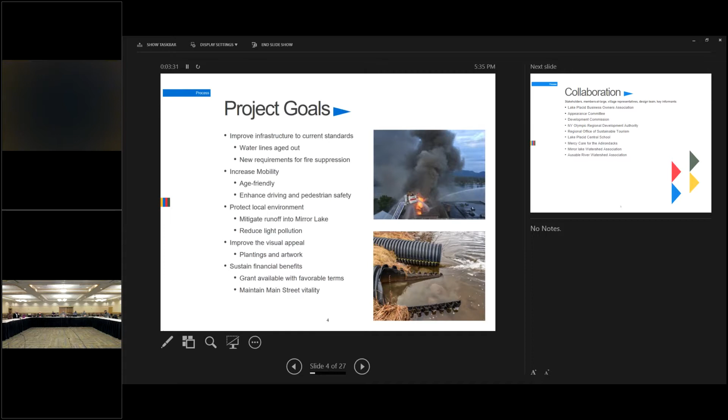And we've made efforts to reduce light pollution also. And of course, all plans say we have to maintain financial responsibility. You can't do anything which is not fiscally responsible. This particular project was the result of a great deal of collaboration.

If you're looking at your computers at home, you are looking at a fairly lengthy list of stakeholders. Mayor Randall contacted each of those stakeholder groups and asked each one to send a representative to a focus group. That's where the 21 people Mayor Randall mentioned come from. That group then met with the design team, looked at the proposals, then went back to their individual groups, who made suggestions, and then came back to the design team and revisions were made to the plan. That process occurred at least 4 times that I can recall, probably more. So there were a number of revisions based on all the input from these groups.

We can almost check the bid construction process, because as we know, very recently the bids went out. Each contractor was asked to submit two bids: what would be the cost if you worked without interruption, started construction, ended construction, and worked as many days as you could, barring the winter break. The other bid said no work during the summer season, so you would just work in the spring and fall as far into the winter as you could.

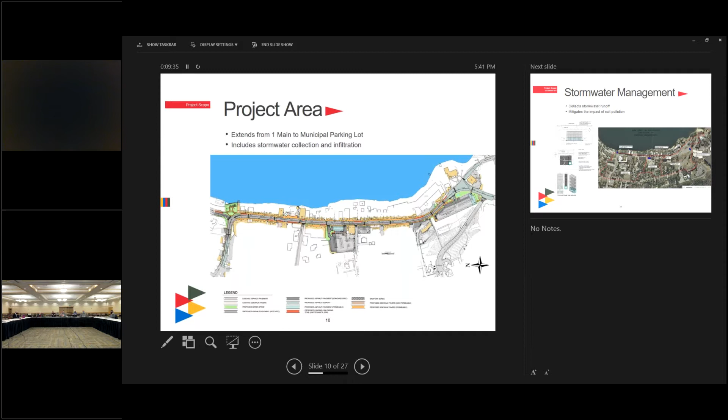The stormwater management system captures that water in 3 locations. There are 3 main catchment basins or catch areas, and they're kind of hard to see on this. One is on Main Street, the large parking lot, shown as the blue section. There's another blue area by the central lot, and another one on 1 Main.

So these are basically big bins that fill with water, and they allow the water to filter out the bottom. If there is ever a major surge and the bins get filled, then there is an overflow system that takes the overflow water out toward the Chubb River. So basically, all the water, the soils filter, and it eventually flows into Mirror Lake.

This does what we want it to do. First of all, it picks up all the point pollution, it picks up the motor oil—none of that can get through the soils. One thing we should continue to be concerned with is that it does not take the salt out of the water. Once salt is dissolved in water, it's a very expensive and energy intense process to separate the salt from the water.

It still helps Mirror Lake, however. If you can envision a storm surge, a lot of salt is being washed into the lake at once, and that shocks the ecosystem and makes it harder for all the biological functions of the lake to occur. By catching all that water and filtering it through the soils, it means there's a more even flow of salt and less stress on the biosphere of Mirror Lake.

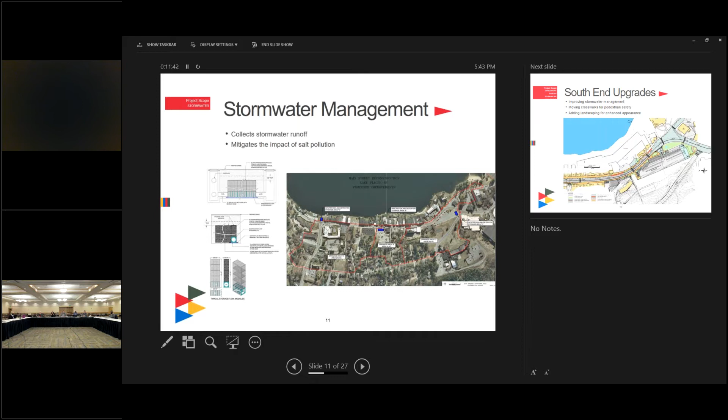Moving along then, if we start on the south end of the construction area, you are looking at the main parking lot with the post office and the Adirondack Church, also indicated by the tan structures. This area does not do a large number of changes, but there is an infiltration system you can see on the far south end of the lot. The green area, the open space area is increased, and some of that area becomes semi-permeable.

And so the idea here is we do a few things. We do work into the stormwater management system. It also keeps the parking essentially the same, and at the same time, the crosswalks are moved slightly to enhance pedestrian safety. There are not a lot of changes to grades or other parts of this section.

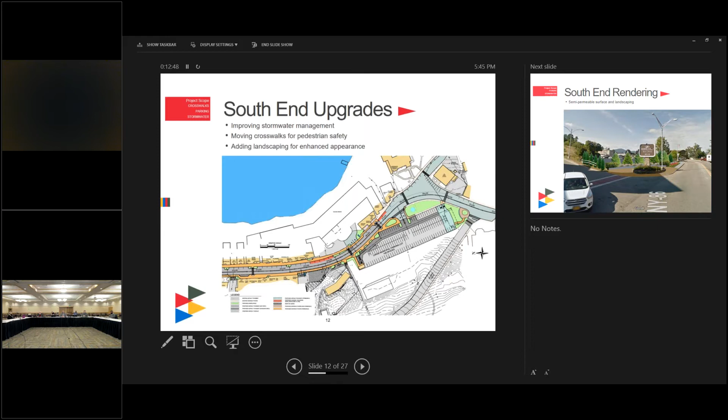This rendering shows how the extended green space in the semi-permeable surface can enhance the view of the anchor of the pedestrian area. This is the first thing a lot of people see as they enter the pedestrian corridor, and we want it to look as good as possible.

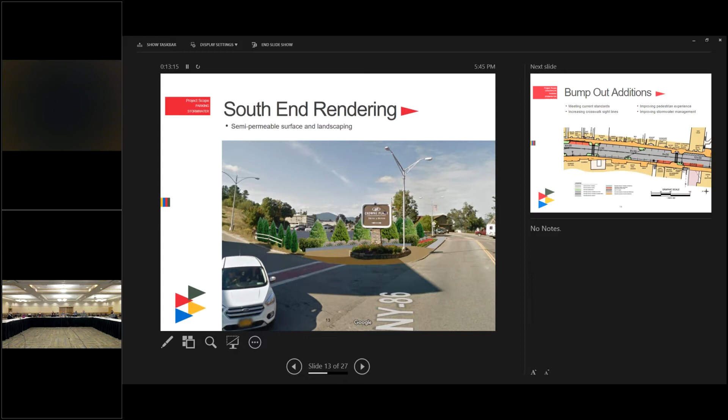As you move up the street, there are bump outs, cleverly called bump outs because they bump out into the roadway. They're the green areas bumping out into the roadway, and they have two different functions. The ones to the left, you see 4 bump outs surrounding the crosswalk, which improve the sight lines for pedestrians crossing and for drivers moving along.

We've all had that experience where even though pedestrians are crossing at the crosswalks, it appears like they're jumping out between 2 cars. You slam on the brakes, hope you don't hit the person, hope the person behind you doesn't hit you, get that shot of adrenaline, and say, thank you, I didn't kill anybody. We want to improve the experience for drivers and pedestrians. The sight lines, although people are still going to do some of the things people do, delineate the crosswalks and hopefully mitigate part of that.

If you look at the bump outs in the center, they're not by crosswalks. That's because the filtration system and water catchment basins need to have green areas, and that has a lot to do with the grant funding and how they function.

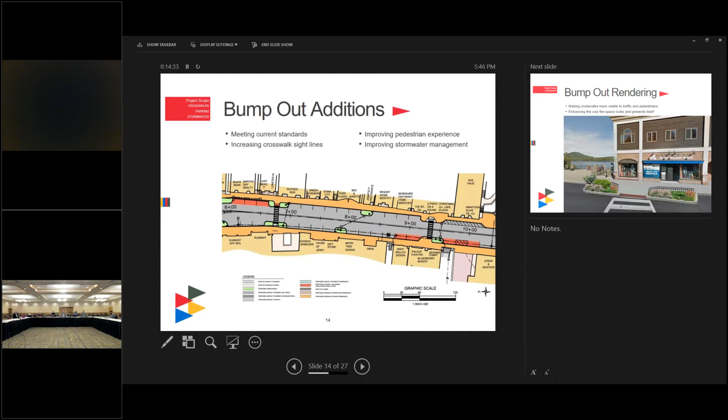Every bump out, because it has different functions, locations, and sizes, will be designed slightly differently. But this is what a typical bump out may look like, and you notice it does improve the sight lines of the crosswalks.

It has another purpose: it gives an opportunity to take some of the obstacles on the sidewalk and move them off the pedestrian corridor. So as much as possible, the light fixtures, the recycle cans, the parking meters will be placed on bump outs, so your experience of walking down Main Street will have fewer obstacles.

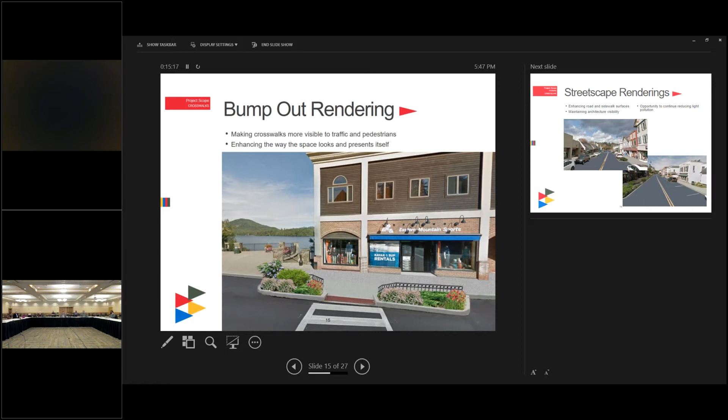More importantly, they show smooth surfaces. Main Street is anything but a smooth surface right now, and the sidewalks are anything but a smooth surface right now. Improving the surfaces of the roadway and sidewalk will enhance the pedestrian experience and the driving experience, and give everybody a little bit more accessibility.

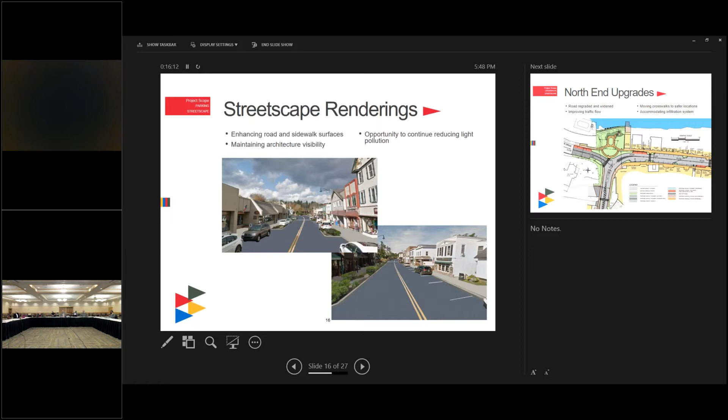Notice that the planning plans also call for maintaining the views of the architecture, because one of the unique things about walking up and down Main Street is you're walking through 1920s, 1930s kind of architectural styles. At the north end of Main Street is probably where the largest number of changes take place, or the changes that are most visible.

You can see one main park is that green area, and it is pushed out a bit. It is going to be enlarged, and it needs to be enlarged because that basically accommodates a catchment basin for the infiltration on that side of the road.

That enlargement does a few things. You notice it realigns the intersection of Mirror Lake Drive, coming in from the left, and Main Street, turning to the bottom of the slide. So it delineates the traffic flow a little better, which will help the traffic pattern. It also means we can move the crosswalks to locations which are safer and cross less traffic.

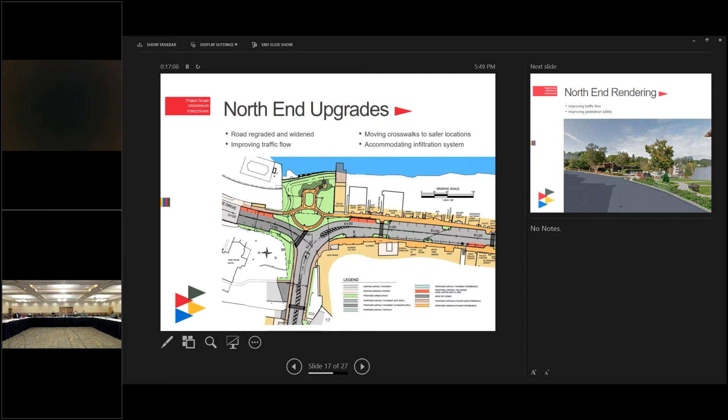There are some other things that take place there. The grade is the reason the project goes up past the High Peaks, because the grade is slightly changed. It's hard to tell on this what the original grade is, but basically that grade is changed. We've all seen snow plows, buses, and trucks get stuck on their way up Saranac Placid Avenue in the middle of winter, and hopefully this will help solve the problem.

You can also see with this rendering that as you drive north on Main Street, you no longer look straight down Mirror Lake Drive. It's pretty obvious it's a different road, so any visitors don't have to worry which way to go, straight or south.

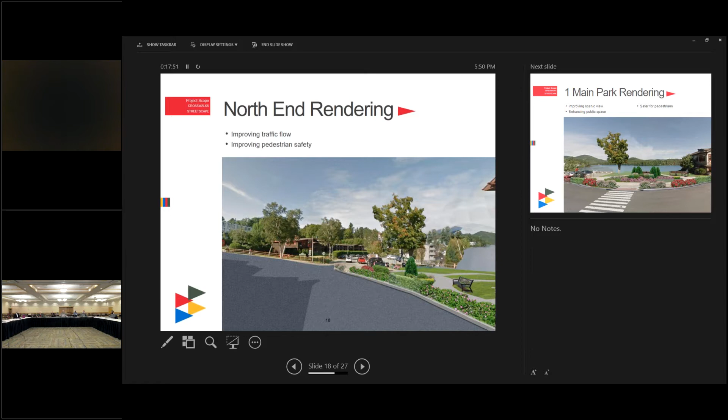And that will help that area. The next slide is a face-on view of the bump out.

We talked about having anchors on either side of the pedestrian area, so we have one of the most vibrant and vital main streets because we are a planner's delight. We have a park on the south end, Peacock Park, which provides access to the middle, and we have an anchor on the north end. In between that, we have about a half mile of beautiful scenery, a beautiful streetscape. That is what everybody is searching for in terms of creating a vital pedestrian corridor, and this, we believe, will help increase the vitality of that corridor and also increases the aesthetic views.

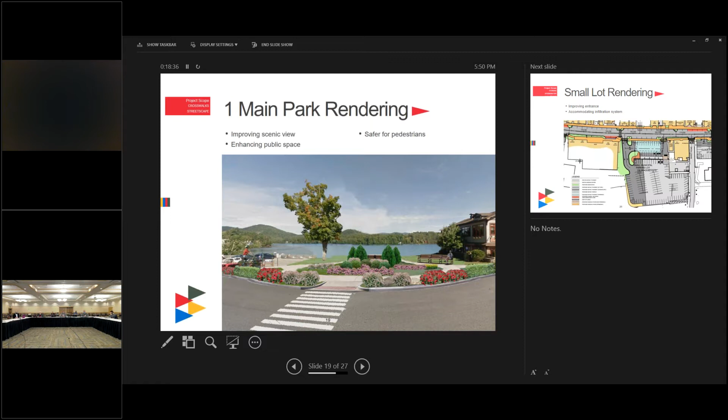My guess would be, and I don't think it's a guess, that the focus group spent a great deal of time on parking. We all understand parking's been a traditional problem forever in Lake Placid, ever since cars were invented anyway.

One of the changes that will take place are to the small lot. This is referred to as the central lot, though colloquially it's referred to as the NBT lot - the lot by Hayes Street. This will undergo some changes: grading changes, some parking spots added, and the crosswalks revised for safety reasons to make it easier for pedestrians to cross. Of course, the restrooms can be redone, so we'll have better restrooms.

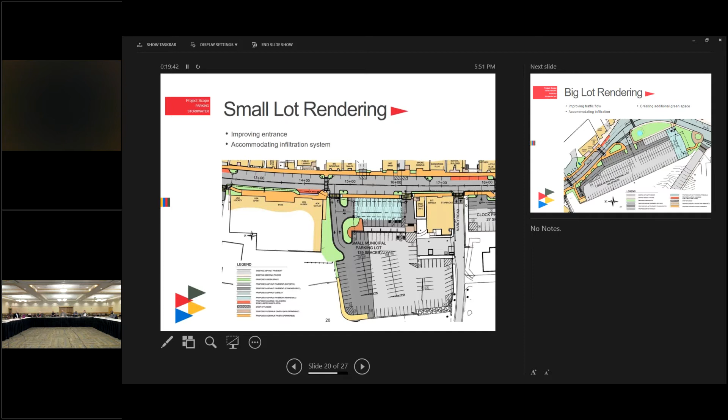One of the other things is that this does allow for more handicap parking in this area, which is very close to the library - something that seniors on the focus group felt was very important. So we accommodate some of the needs of our senior citizens that way.

The big parking lot does not essentially change. As we said, most of the changes here are the infiltration system, the semi-permeable surface. The parking remains essentially the same as on the big lot.

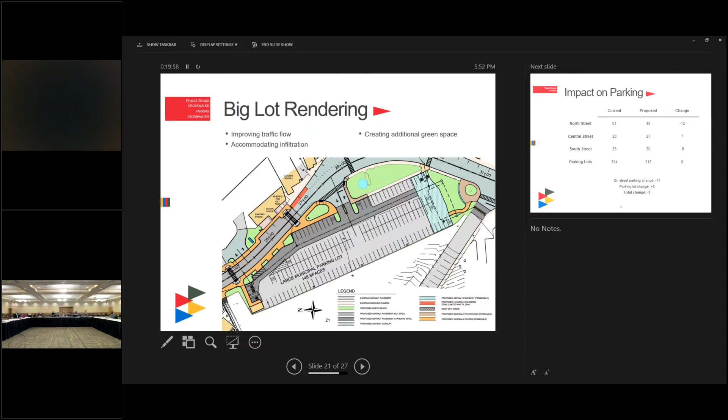If we go to the next slide, this indicates the total impact on parking. Need to talk about a few things about these numbers. One is the current and proposed numbers are before construction and after construction. They do not deal with any proposed or future enhancements. We all know there are talks about future enhancements to the central area and to the main parking lot, but they are not included in these figures.

The other thing is that all the parking areas and loading zones are included in these figures, because the loading zones are really parking areas at the time when Main Street has its peak usage. So these numbers represent the maximum number of parking spots available at peak usage times of Main Street. We thought that was a good way to approach it.

You do notice that the north section of Main Street, which for our purposes goes from 1 Main to Hayes Street approximately, loses the most parking spots. The central area, which continues from Hayes down to Marcy, actually gains about 7, and then we lose a few more spots in the south.

The numbers in the parking lot actually increase, and I would note that most of those increasing parking lot numbers are in the central lot, the smaller lot, which if you wanted to place them in the left-hand column would be close to where it says central - closer to the central north section. If you look at all the changes across the entire construction area, the total change to the number of parking spots is a loss of 3 parking spots. Again, that does not include any future enhancements to the central lot or the larger lot which may take place.

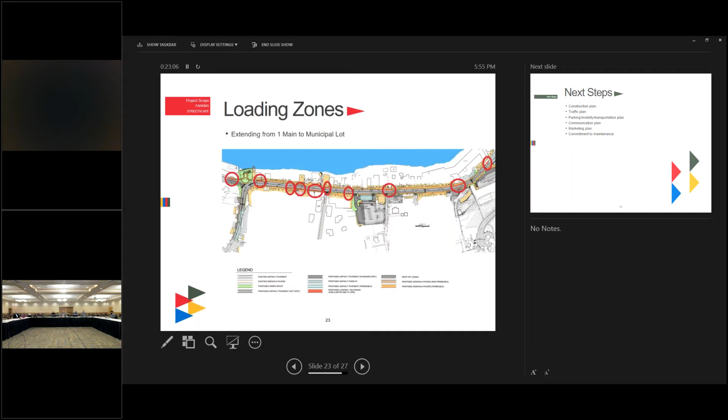If we find the loading zones are insufficient, it's pretty easy to paint some more lines or move them from one location to another. That happens all the time as the needs of the businesses along Main Street change. The other thing is loading zones are flexible in terms of time policies, so the loading zones are designed to be available for parking during peak times, simply because the sign says you're a loading zone at some points in time and not at other points in time.

We all know that getting to the end, doing the things we just talked about, will be disruptive, and all of us know this from our personal experience. Anyone who has remodeled a kitchen or put new flooring down knows it's a disruptive process. Now that we know the construction plan, we can start to take more steps to mitigate and soften that disruption as much as possible.

We have a preliminary traffic plan. We talked a lot about parking and mobility and transportation plans, but now we know what the construction seasons are going to look like, we can work on those plans more diligently and get them in place. Stay tuned—there will be future meetings like this one dealing with traffic plans, parking plans, mobility plans, transportation plans, and a marketing plan, because we still want people to know that Main Street is open, that it's vital, and it's a great place to visit.

None of those, of course, mean anything without a good communication plan. We've got to make sure we reach out in a proper way and exhaust all possibilities to talk to visitors, residents, business owners, anyone who's impacted by Main Street. So a communication plan is also going to be key.

One of the things we also recognized was that with new green space, there's got to be an increased commitment to maintenance—it requires more to take care of this. We have new stuff, and funding streams are being prepared to supply that, to fund the maintenance that will be necessary for the new parts.